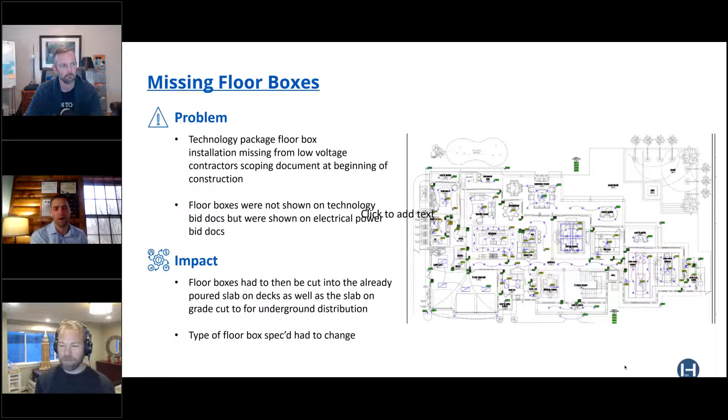So our client that we were partnered with came to us and said, what can we do here as far as coordination drawings go to rectify this situation? So we already had pretty well established coordination models of the other trades. We were able to quickly identify locations where they could core through the existing slab on deck to lay out these new floor boxes. This helped expedite locating and kind of reorganizing who owned what as far as that scope went. And we were able to turn around drawings fairly quickly without too much impact upon their schedule.

It was interesting. One of the things that I learned from this is that, not only from our perspective when we at Hale are bidding on a job to provide coordination services, but for any contractor that's bidding on these packages that may involve other trades or may have some of their scope shown on different bid docs, is just to fully review and digest the information that you're bidding on to make sure that you're not missing any scope and that nothing's left behind.

And in this example, a good lesson learned would have been, the GC, the CM could have said, hey, look, this low voltage sub is not falling behind, but they're coming late to the game. We got to quickly repackage some of that work into the electrician's package so they don't fall behind. So that was something that we found pretty interesting on that project.

Yeah, I think though what I always see is, jobs are moving fast. They're always faster many times, even when drawings are not vetted or fully completed. So would you say that you really have to leverage even more the expertise, because you almost have to fill in the voids of contract documents with expertise itself? And to me, it sounded like you were asking the right questions, and maybe if they had brought you on earlier, or had people that knew what to ask, some of these costly mistakes could have been avoided.

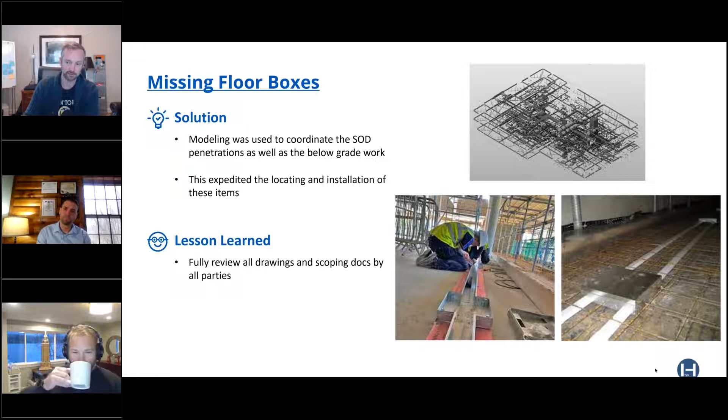Cool. Thanks, David. We got plenty of stories.

Okay. So this is a job I was on where we also had a consulting arm at the last company, and so we acted as an owner's rep for a very large design-build project for a large institution. We were doing 5D analysis, estimating and scheduling. And one of the pervasive problems that happens in a lot of projects that has extreme effects on the VDC side of the world is your schedule.

So we see a lot of schedules happen inside of Excel. Like, that's where information goes to die. And two, it's very hard to update. The great part is it can be easier to consume. The bad part is you may have outdated data and nobody knows about your plan except for you. So on this job, that is what happened in many instances. There were quite a few different things.

We always hear that the job can be built in this amount of time, and it's like somebody just magically came up with that. You have no idea how. And here's an example where data was built in Excel, but really it needed to be in the actual contractual schedule, because when you do 3D coordination, the minute that your model is signed off as being coordinated, then it goes into fabrication after it goes through a legal submittal approval process that the specs require.

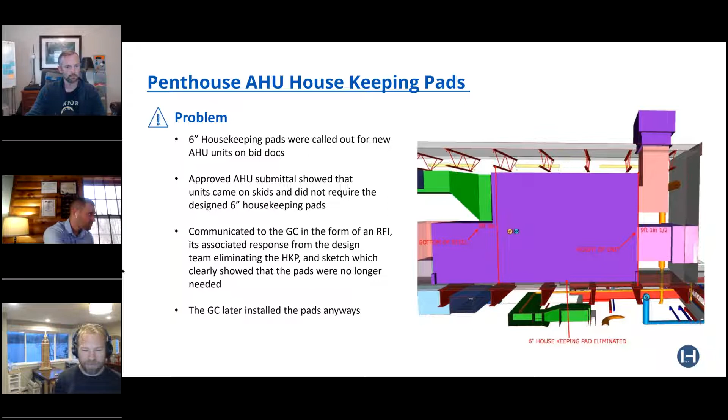It caused an issue with the crane, because they had to keep the crane rental longer. The GC had to go in and now chip out and take out all of the housekeeping pads that they installed. And the enclosure of the penthouses was delayed, and all of a sudden snow is flying, and they're setting these units in the snow before they could get them enclosed. So really, we had already coordinated this issue, right? We already resolved this issue, but then it came back up anyways later on.

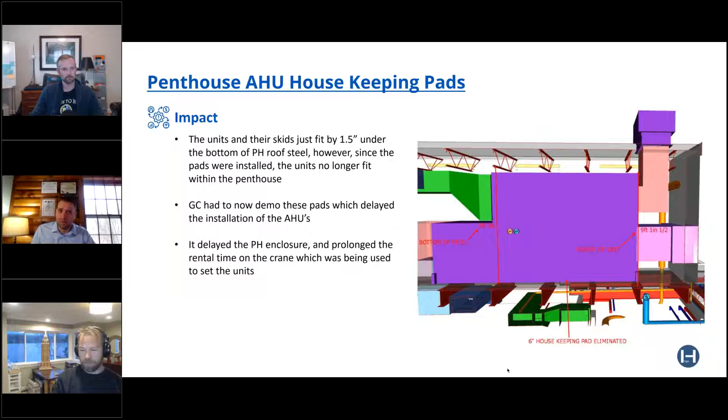So as far as our solution goes, all we could really do was confirm that these units are supposed to be without the housekeeping pads, and we recommunicated that back to the general contractor through our historical project data. We sent the meeting minutes, sent the submittal data, sent the official RFI response from the design team removing them. And basically that's what the solution was. The GC had to remove all of those housekeeping pads.

Some of the things that we gathered from here, and I think I'll skip right to my last bullet, is that we really need all contractors to participate in the BIM coordination process, even if they're not physically modeling anything, right? It shouldn't just be on the MEP, FP contractors or the utility contractors to hash this out. You have to have the steel guy there. You have to have the GC there, because when we're coordinating projects, we're having a huge impact on what's happening day-to-day on the project and what's happening 3, 30, 60, 90 days out.

And people need to be aware of what's going on with those trades, just like this. If the GC was on these calls, they would be aware more intuitively of what was happening with these pads. Another good one from this lesson learned is we just need better organization of our information as far as how we manage projects. Every single project is managed differently by the GC, the CM, whoever's leading the charge or holding the contracts, or being the owner's rep, right?

And we really need to focus on streamlining, using platforms like Brian's over at Procore, and making the information on the project available to everybody and disseminating it to everybody. And I think things like this would get caught quicker.

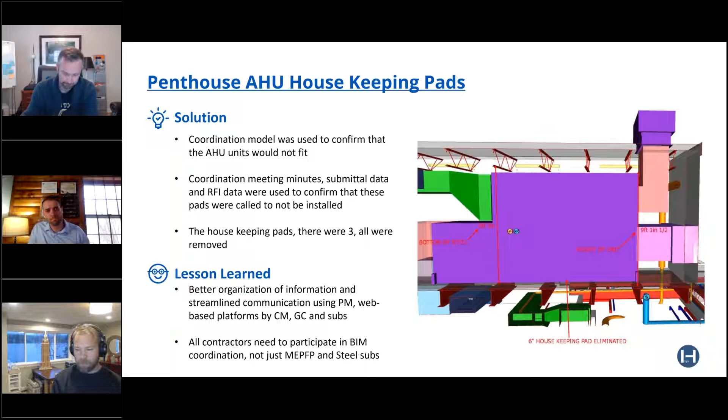Yeah, cool. Let's see what we got next. Ceiling exposed during demo. I've experienced this. The mystery ceiling. So this was another job. It happened to be a school job again. There's a lot of school jobs happening in New York State over the past number of years. This one was kind of interesting, and it was kind of fun to solve. It created a huge headache for the CM, and like all CMs, he was raring to go just to get this issue resolved.

As they start demoing the corridors, they expose this existing ceiling system, and it was throughout about 90% of the space that we were working in. The issue it caused is that now all of the MEPs that we had in certain areas in these corridors were either in conflict with this existing ceiling, or, because we had routed some up and through the interstitial spaces of the joist spacing, were now above this existing ceiling. So it really put a halt on our coordination efforts, or made us go back from our current areas and relook at this area.

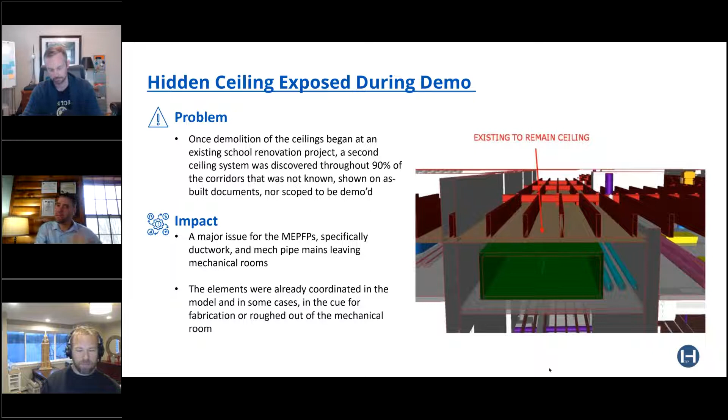We then took that scan data, brought it into our coordination model, and we flagged only the areas where we had conflicts with this existing ceiling. So we kind of did some selective laser scanning, and then we produced a PDF that the GC took that showed where these existing ceilings needed to be demoed and where they didn't, right?

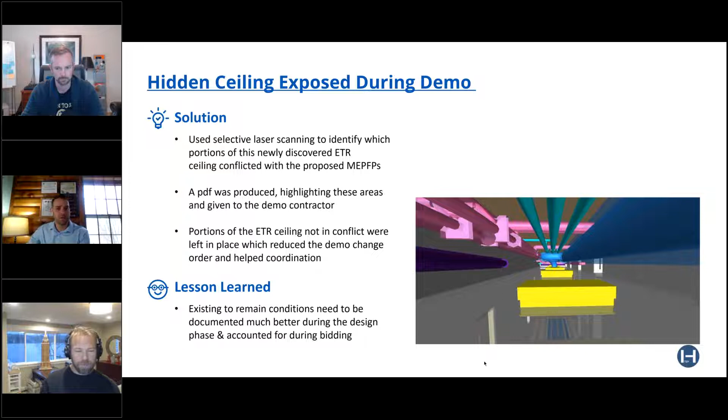Because at this point, because the ceiling wasn't known, the demolition contractor now had a justifiable change order, right? So in order to help him control his additional fees, he was able to take this PDF and say, well, we don't need to demo everything. We're going to save time and only demo where the coordination and the MEPs need us to demo, right?

Let me go back. So like for this example, we were able to then model that existing ceiling in and visibly see where we had utilities above that ceiling, which caused an issue, or below, right? So this is a good example. You got pipe going through that ceiling. We have pipe above that ceiling. You got some ductwork kind of in that tan ceiling.

And we were able to then go and re-coordinate those spaces and or tell the GC, demo the ceiling in this area, but we only need like 10 square feet of the ceiling removed. You can leave everything else in place, abandoned in place.

A lesson learned here, this one may have been a little difficult to figure out. Some of these ceilings were hard lid ceilings when the design team did their walkthrough and their building design analysis. But it goes back to just existing conditions need to be documented much better during the design phase and accounted for during bidding, right? So this was kind of a big miss, and fortunately the project called for BIM coordination.

But if it didn't, the laser scanning option would have never been used and the GC would have easily submitted a change order to demo all of these ceilings, and it would have cost the project extra money. Still cost the project some money, but not as much because we applied the technology to resolve the issue.

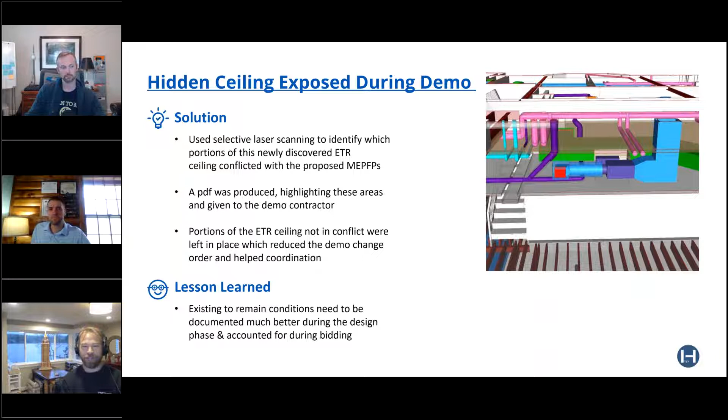I think it's one of those things that's going to continually come up more and more. The ability to scan has gotten democratized, but I see retrofits just being more elaborate, knowing the envelopes, being able to really understand where we're at with the ESG and compliances and what is the airspace. And now we need to know those kind of things, whereas before it was kind of a nice to have. Exactly.

All right, TI build out gone wrong. TI is tenant improvement. And I think the problem that we're looking at here is just everywhere in construction. This could be a brand new building, and in this case it was. But it can also be an older building where maybe there's been some work done to it and you have an as-built set of plans, and the architect or designer goes wild and is ready to just build off of this set of plans.

They bring it in the CAD, they start to do all their layout, they coordinate with the new tenant that's going to be in there. What do they want the space to look like? How big do they want the kitchen? How many seats are going to be here? And then they start ordering all this stuff. And at that point, back to schedule, the ship has sailed, right? The contractor's been hired, starts doing the tenant improvements per contract, breaking it back down, like David was saying, into the electrical, into the technology scopes of work.

And everything looks great until they start to put in the actual desks, the cubicles. And back to the floor diagram, the floor boxes, this becomes really critical when you're dealing with spaces that get built out to typically inches. We're not talking millimeters like pipe fitting, but the desks and egress become a safety issue, so you have to meet those minimum specs. Well, in this case, it was a little too late. They found out the building was 2 feet smaller in this one area than in the set of plans.

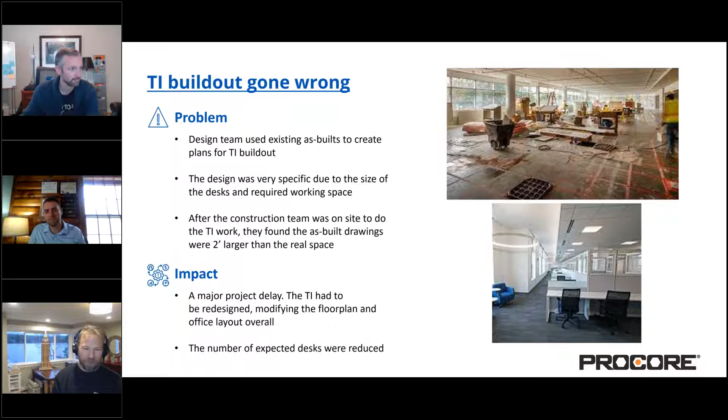I think nowadays maybe that's not as big of an issue with so much work from home, but it's that whole expectation of what you think you're getting, what you're paying for, and to rectify it, to really figure out how to reseat all of those cubes and how to replan what that floor space was going to look like. Now they had to redesign the entire floor again with the right set of plans, and maybe not optimized, because they were trying to use the same set of furniture that they had already bought in the first place without having to return it, because you can't return that kind of stuff. And the lead time on it is pretty long as well.

So I believe specifically on this one, they had to come back and install more furniture later, months after people were occupying the space. So again, just additional costs. So lesson learned, check as-builts, right? Verify. This kind of goes back to David's last one. You can't see everything, but if you just plan a little bit ahead and know where the big oopses can come up, and this is just a simple TI. So measuring twice, verifying the plans, verifying the contract, verifying the schedule are all big areas that really should be examined more than once on every project.

And I'm curious, with all the things that are happening right now with supply chain, it almost feels like it matters so much more right now to know exactly what the as-builts really are, because you just don't have time to even order. There's no second chance. Lead times are even longer. I can't imagine traditional ways of thinking about how to do a TI aren't out the window. You almost need to have it all locked down.

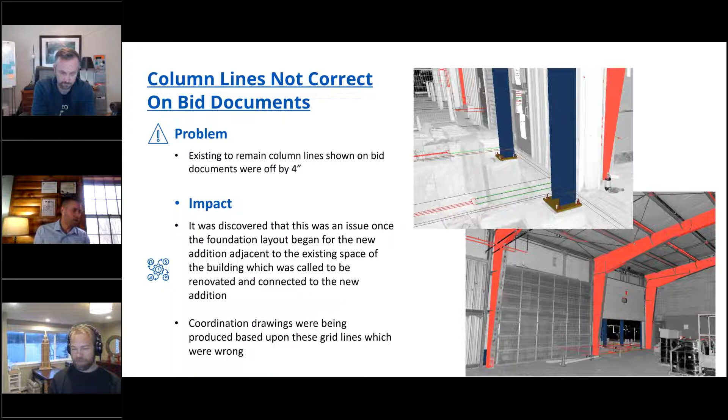So we quickly realized, let's get the scanner out there and resolve this. And so we took a number of strategic laser scans to see where the existing frames or column lines were versus where they had already started pouring foundations. And this allowed us to give the scan data to the structural contractor. They were able to then move their model and their column lines accordingly to where they were actually physically being installed.

And that also allowed us to update our grid line so that our dimensions that we were giving weren't 10'8" to column line 1. They were actually 10'4" to column line 1 instead of 10'8" in the field, which would have created a domino effect on the other trades going downstream.

So again, same lesson learned as before. Existing conditions need to be documented much better during the design phase and accounted for during bidding. These grid lines were exposed during the design process. So a simple measurement to create their proposed design drawings would have shaken this issue out way before construction even began.

Yeah, and I know we're a little bit pressed for time, but I'll say that one thing that we had to do is, we were a $1 billion firm, but we got burned on a few projects to a point where any job over, it was 15 million at the time, I don't know what it is now, we would do a model on it. So we'd consult out, unless we could do it internally, and audit the model compared to the drawings before we ever started.

A low fidelity model is so helpful, right? To just even pick these things up. Yes. A couple inches is not a good thing to find out when you're erecting steel or trying to marry something into an existing, as David was doing.

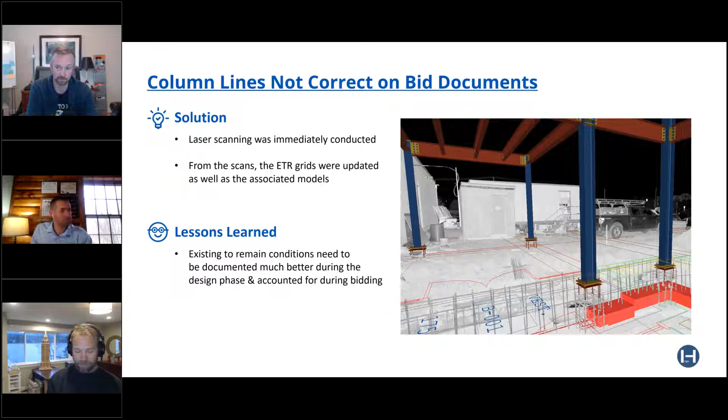Okay. So Brian. Oh, muted. There we go. Yep. Sorry about that.

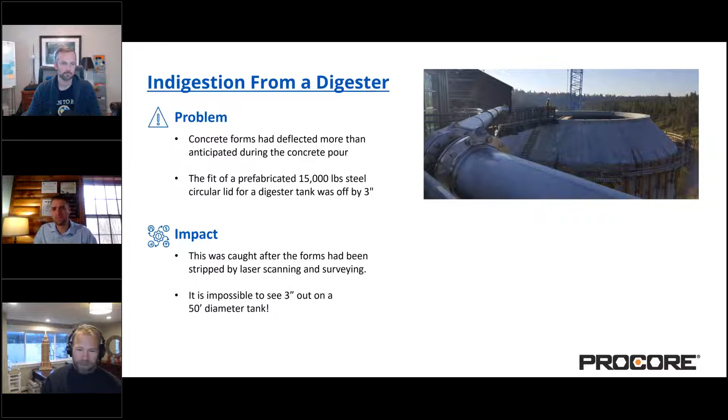We've been laser scanning everything pretty much the entire project. Again, James, back to looking at the areas that we know there's problems. Anytime that you're connecting to something existing, probably should scan it. And so we scanned the existing before, we scanned it during, and then this time we had actually scanned the forms before we had poured, just to verify that it was actually where we wanted it to be before we poured, but also just underneath it to make sure everything wasn't going south. So as they poured, though, apparently the forms deflected, and you can't see a 3-inch deflection at that angle 85 feet up until it's hardened gray.

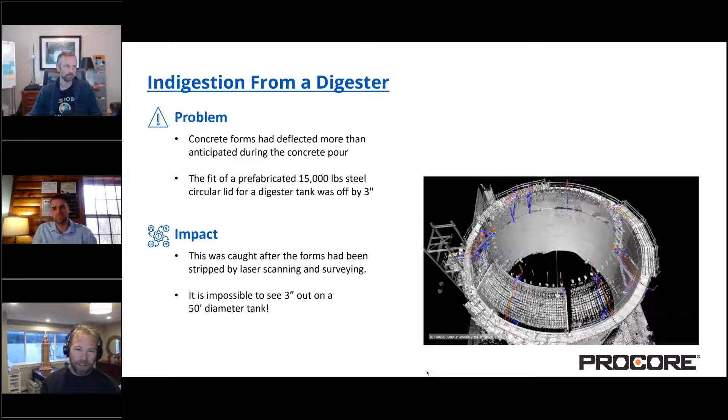So once concrete's hardened, there it is. And so it was one of those opportunities, and again, we caught it before we did the initial lift of putting the prefabricated steel up there, because after it was poured, we were going around just doing checks, again, using a robotic total station. And at that point, we realized that there was something off.

And this is kind of a neat story too, of like, you can use robotic total stations, laser scanning, and BIM all together. It is the best mode to solidify all of your workflows, especially if you have a team in the field that's able to go and do layout, and actually be able to pull back into your model where those real world points are, kind of like all of our other discussions of what's the reality versus what was designed. And in this case, we had enough information from the laser scan and the robotic total station to be able to understand where the deflection happened more than the other areas.

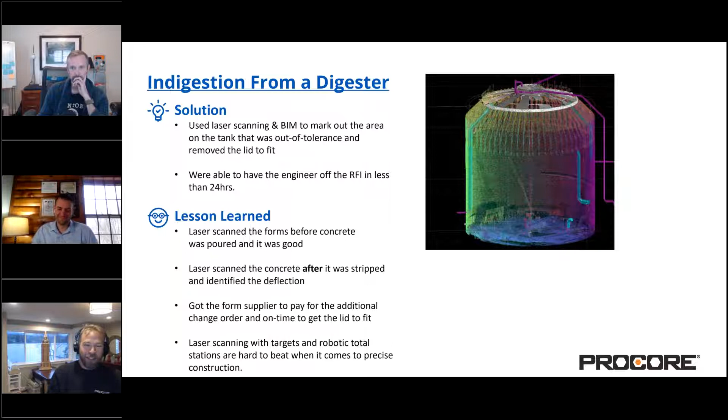And then ultimately, we also laser scanned the lid, because we're like, well, geez, what if the lid isn't exactly perfect, right? That would be really bad. And these were all kind of like thoughts as we were going through, and we called this a critical pick as well. So it was over 15,000 pounds. It was one of those things that is kind of irreplaceable. It would set the contract back into LDs. So we didn't want to get into any of that either. So we made sure that the crane's pad was good, the crane could lift it safely. All of that was done using laser scanning.

And then we were able to also verify the areas with the total station after we had identified the areas that needed to be removed, and got the engineer's permission to clear off about 1.5 inches on each side of the digester lid area to be able to set the lid in securely with the tolerances that were specified. So because of the model and because of the accurate information, how fast we're able to turn it around, we're also able to get an RFI from the engineer saying, yeah, it's supposed to be 18 inches wide, but we're going to make it 15 inches wide in this one area at the maximum. That would be our most reduced, and then we're going to taper it back in.

And we got our RFI approval, and they changed it, and we were able to actually even go back to the form company that had done the form engineering for us, and they contributed a little bit of money as well to solve for the fix and the delay, because we were able to prove that we had set the forms correctly to their specification, and the deflection shouldn't have happened to the level that it did. So kind of a cool case story.

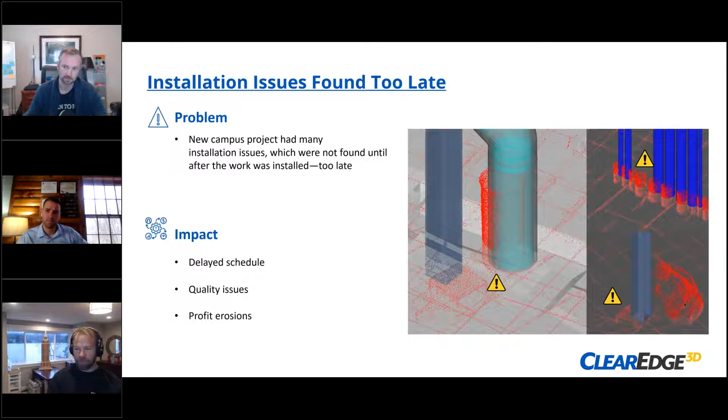Because if this pipe or this column is in the wrong spot, and it's inside of a wall, well, now that wall's got to move. This steel post is not moving, most likely, right? So it really does matter that you put all this effort into coordination, that you actually are validating and ensuring that things are getting installed correctly.

So our solution was to scan on site and do a pre-pour scan, and we negotiated an additional day to scan and do a QA of the pour before the following day. That's very rare. Unless you have an open-minded client, that can be very hard to do. And so we still have this pain of time, where people want to do pre-pour scanning, but it's still like an 8-hour workflow. Maybe something will change that.

But yeah, finding issues. We were out there getting on control, so we'd have to shoot in control, get on control with a scanner, and then send that out to the VDC department to analyze that against the model. The more of that can happen in near real time, the better off everybody is.

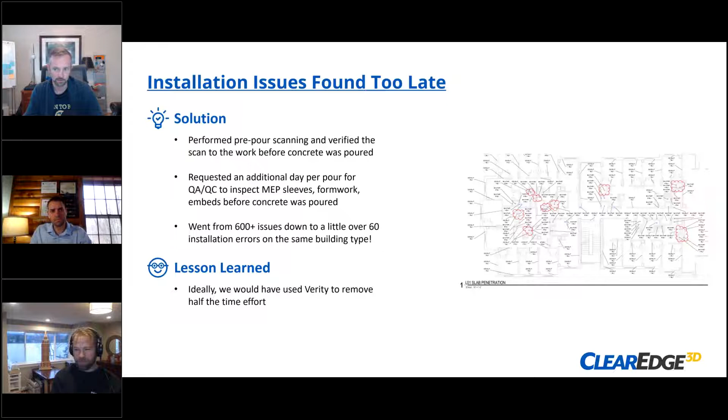But what we did end up finding is we found lots of issues, and it led to us being very proactive. In the exact same building prior, there were over 600 installation errors. This time around, we had 60. So while we did have to negotiate an additional day, it was a mixture of being able to scan prior and finding those issues. You can see we had like 10 deficiencies on the slab on grade, and then it just instantly dropped down, because people were being held accountable.

All trades, including ourselves as a GC, but also MEP and structural. The job finished 2 weeks ahead of schedule and made a decent amount more profit, actually. The only thing we would have done ideally is use some automated tools to highlight the issues rather than doing a lot of this manually. For us, it was Verity. It's one of the reasons I'm here.

And I think the ability to establish accountability in this whole process really does help complete the cycle of getting a building built correctly, on time, and on budget. So, yeah.

I'll make this one pretty quick. The problem was the engineer designed and specified specific generators and fans to go in for this retrofit. It was replacing some existing generators that were going to be undersized. And knowing all of the as-built information is really important.

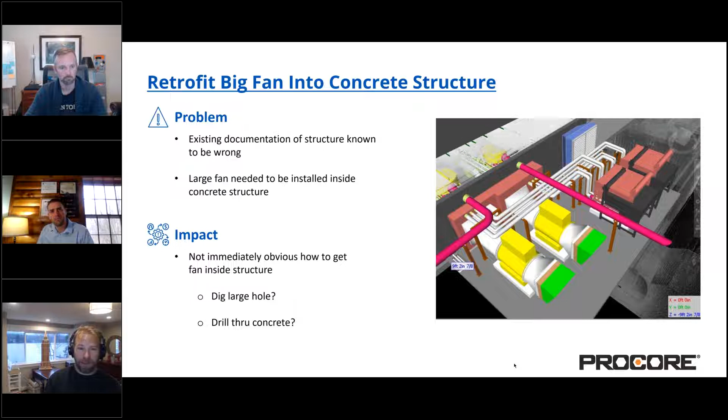So these are really, really large generators that would typically be on the back of a semi. And the building had been built around the generators. So the original plan that the owner had come up with was, hey, general contractors, figure out how you want to get these out and how you want to get the new ones in, but you only have 72 hours of downtime. I think it was actually 48 hours that you could go without it. And so you could do all the pre-work, and they expected demo to happen and a bunch of holes to be dug and pits to be made and shoring.

And eventually what we were able to do is, because we had all of this information, we could work with the structural engineer and verify that, hey, we actually didn't need to cut any openings. We needed to remove a few doors. But we were able to take these apart in small enough pieces and had the actual equipment manufacturer send us all of the modeled pieces that we could then float through the space as if we're walking them through on the actual trolleys that were designed to be able to push these around. And then, of course, we put in crane hoists to be able to reassemble them once they were back in place inside. But because of that, we were able to actually get the job.

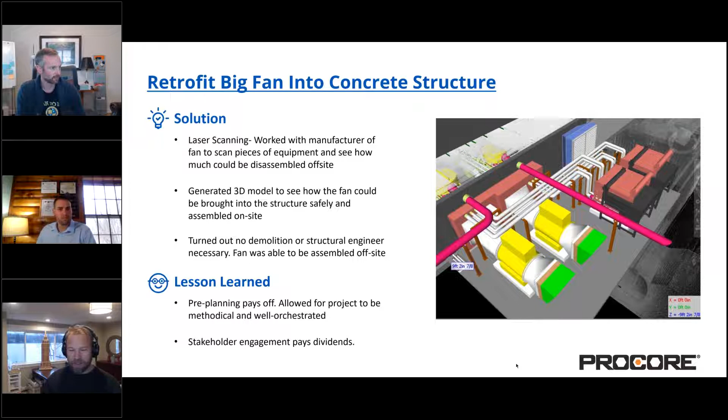No, this is great though. I appreciate the conversation, and thanks again for having us. And any way we can continue the adoption of scanning and modeling and VDC and design and all those things combined, I love being a participant.

Yeah, and we're going to keep going with some of these, really talking about the issues themselves into next year. So for all those, be aware, we're going to really talk about solutions to problems and how they can be solved. Sometimes it deals with tech. Sometimes it's just knowing how to ask the right question. So David and Brian, really appreciate you being a huge part of that.